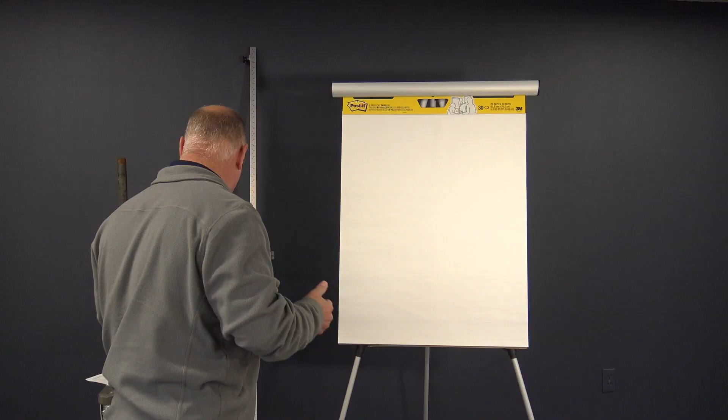Again, I love this feedback. It gives us the opportunity to mingle with our customers on some of the questions they might have. So this week I thought I'd talk about that base process and some of the things we've learned over the years to simplify it. Talking about lasers and whatnot, I thought I'd use a drawing board here to explain it.

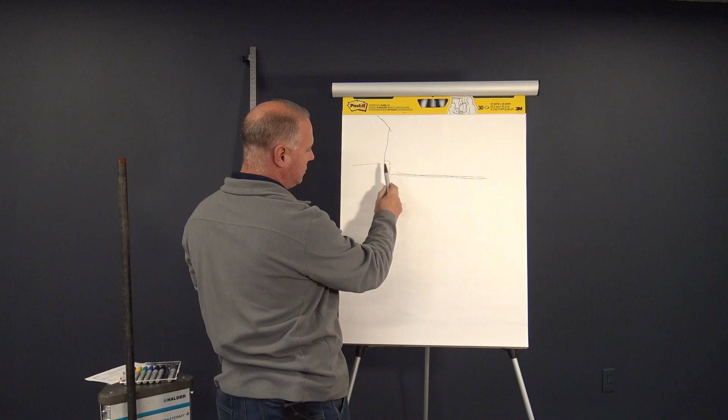So if you have your home here, and you're coming out on your patio, maybe a step, and then you want to lay pavers out in this area. You're going to dig down 8-10 inches with your base, put in your filter fabric. Again, this should have slope on it to match the slope of your patio.

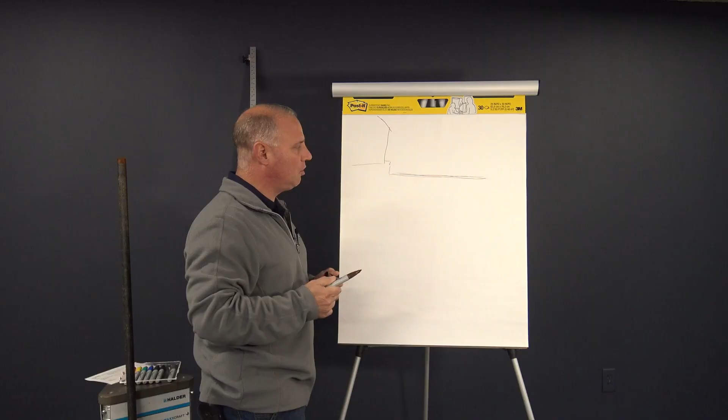If you're doing a non-permeable base, so your regular standard ICPI, you're going to want 3/16 pitch. I usually do 1 inch in 5 feet - that's very simple math for getting your slope. If you're doing a permeable installation, you can get away with a level base, but I would still recommend a slight bit of slope to get your water off, in case your permeable system plugs up over time.

The way I would do that is with a laser on your rough base. You can do it very simply. If you're going down 10 inches, I would add my 1 inch every 5 feet for my base. So if I'm out 20 feet, I know I have to be down 4 extra inches from this point - so 0, and this is minus 4 inches lower.

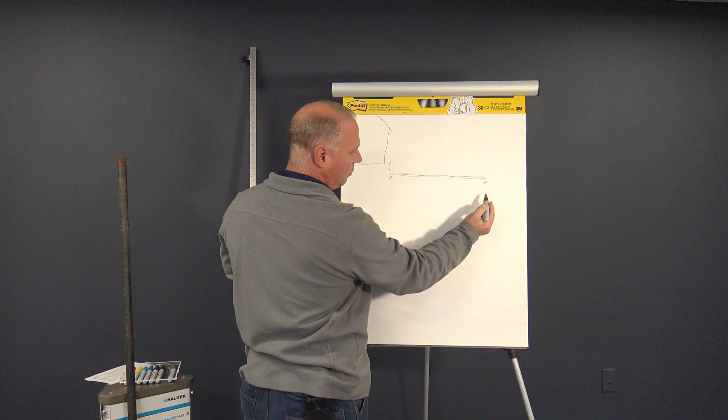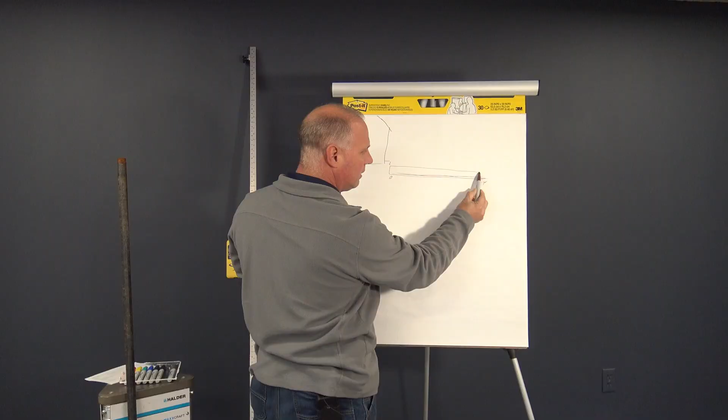So as we're building up, we're going to put in our filter fabric, and as we install our gravel, I would get it really close with your machinery, within an inch or two at this point. Then once I'm done basing, I'm going to get my laser set up again.

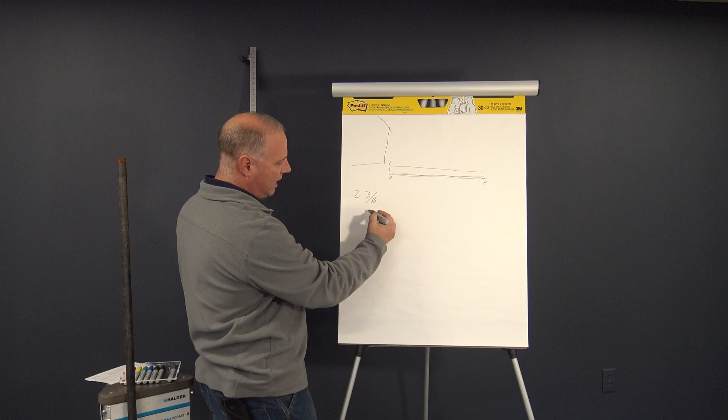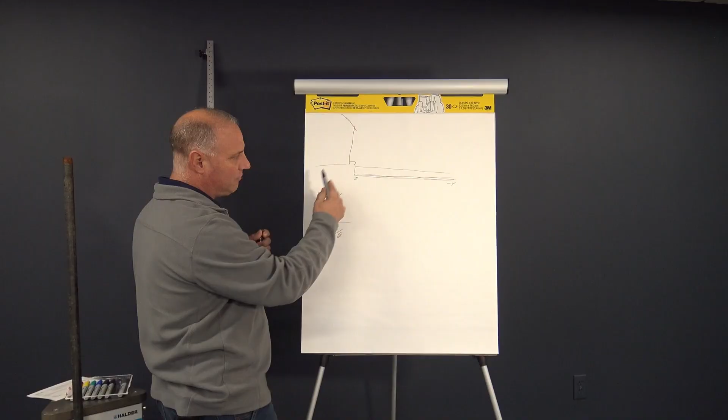If I'm doing a 2 3/8 paver, and I have my 1 inch setting bed - so that's 3 3/8 - I'm going to allow for my 3/8 of compaction after I run my compactor over my pavers, because it is going to embed down into your sand setting bed, that little bit of 3/8.

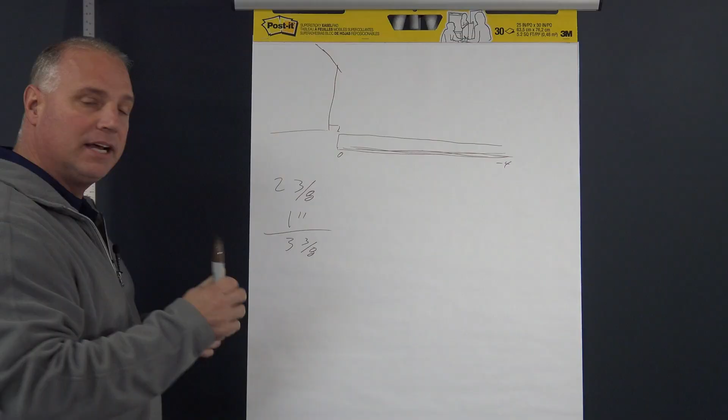If I'm doing a clean stone base with a number 8 stone, you're going to probably only compact about an 1/8 or maybe a 1/4 at the most. So keep that in mind whether you're doing a clean stone base or a dense grade base. Again, that's your 3 3/8.

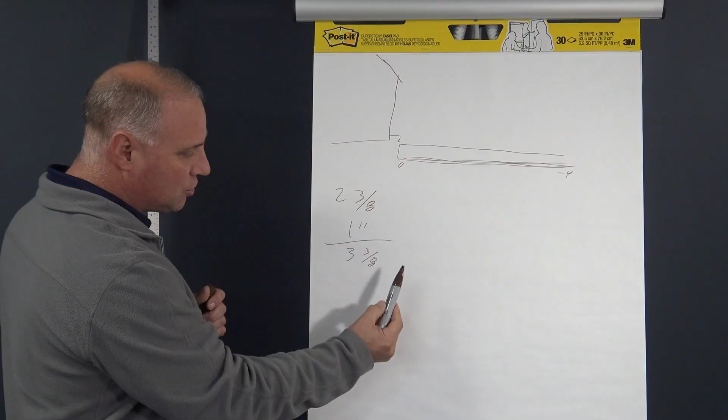Generally, if I'm doing a dense grade base, I'll go -3 from finished grade. So if I get my finished grade exact right here, down the step in my paver, I'm going to go -3 to the top of my gravel.

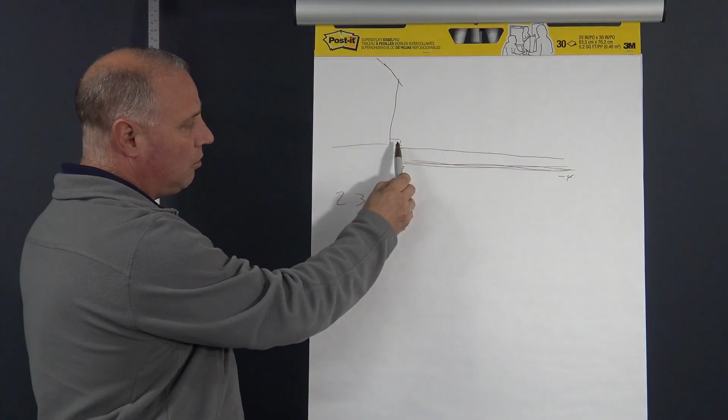The way I'm doing this is I'm going to use my laser level and my laser rod - this really simplifies things. I'm being honest, our guys are really crippled without this tool. We built this on the 0-0 system, which has an internal foot allowing me to set any point on my job to 0.

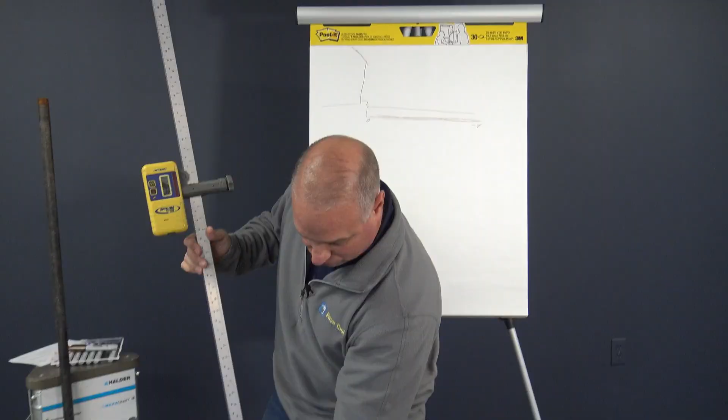So again, if I'm on my job site, I'm going to set my laser rod here, right at this point. I can even build it into my stairs or however I want to do it. But if I want 0 right there, I'm going to set it at that point.

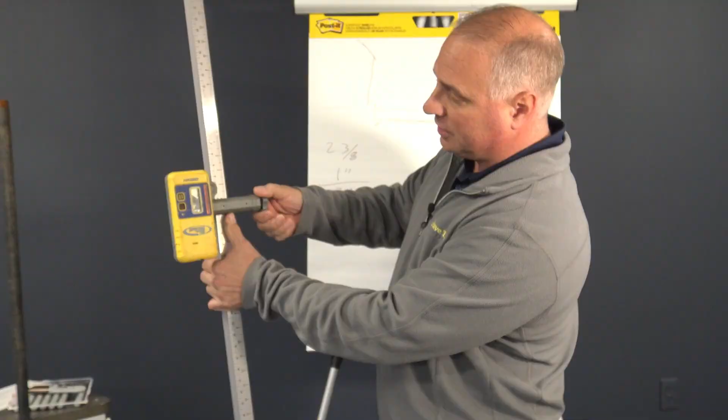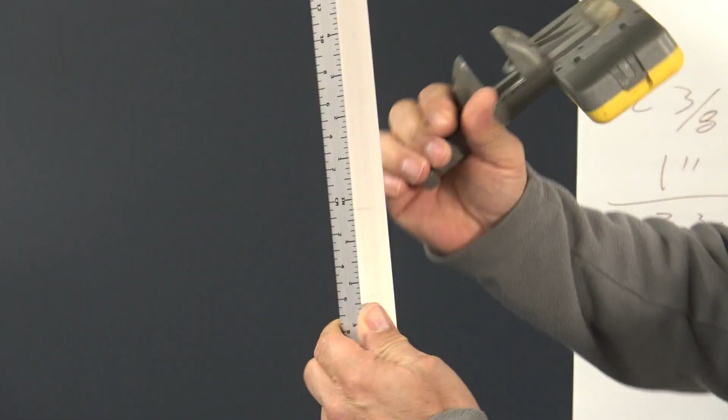This laser rod has 0 here in the center. It's in inches or centimeters, graduates up in inches and centimeters, graduates down inches and centimeters. I have up and down elevation here. On the other side of the shaft, I have 0 at the bottom, graduates all the way up. You'll notice I have stoppers on both the top and bottom.

That allows me to either reverse this pole or say I'm going up a big slope. It gives me a full 6-foot laser rod of elevation there.

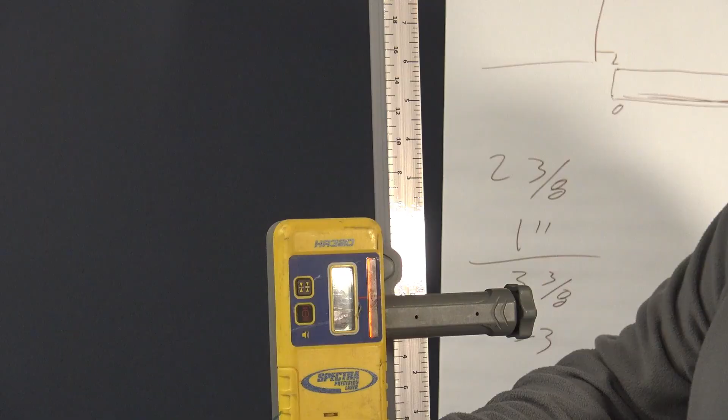But like for this situation here, I can set my laser here. I can lock it at 0, so I'm tightened right up. I'm sliding my pole, so when I get my laser set here, I slide it up. Beep - I tighten that up. So now that point is 0. So I've got my point here at 0.

Now I can slide it up to -3. So up to go down, I'm going to go up to 3. That should be my very top of gravel right there at that point - that should be right there, my top of gravel.

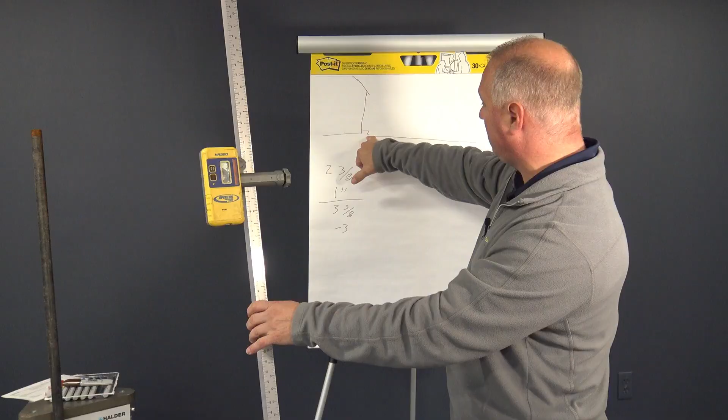So what I'm going to do then is set my - again, if you want to use your screed rail, this is a 5-foot screed rail. We also run 10-foot screed rails, and it makes it really easy if you have 5 or 10 footers, that's generally the way they're going to sell a rod like that, 5 or 10 foot lengths. So if I come out here with a 10-foot length, 1 inch in 5 feet, so simple math, I know I have to be down 2 more inches, out 10 feet.

So literally I can set this rod, I can wiggle it down into my gravel, or again, if I keep that gravel just a little bit low, I can set that pipe exact there. I can go out my 10 feet, and again, I'm -3, so if I add my 2 inches up to go down, now I go up to -5. So at 10 foot out, I'm -5 right here on my base.

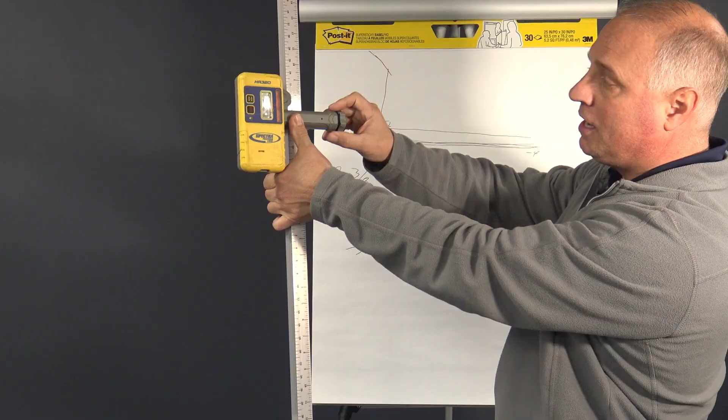If I go out another 10 feet, I'm going to go up another 2 more inches, -7. And I can set those rails right across there. I can set it on my left side of my patio all the way out. Very simple.

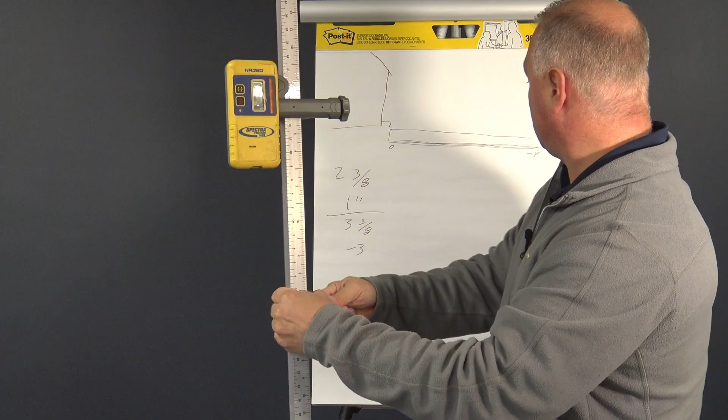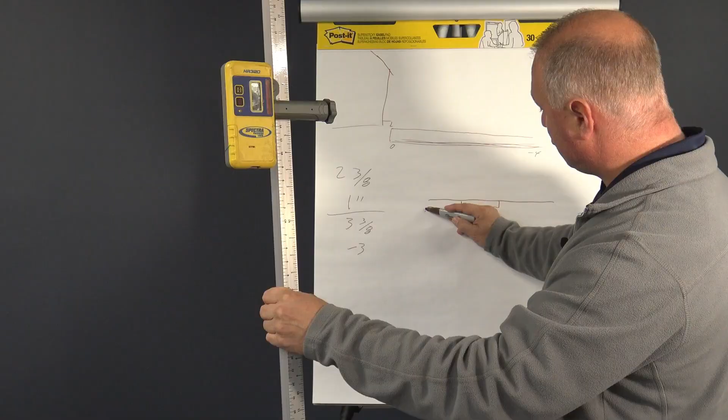So if I'm looking down, this is the back of my home. This is that step that I was talking about. So if my patio is out here, again, I'm going to be my -3 here, out 10 feet. I'm going to lay my pipe in here.

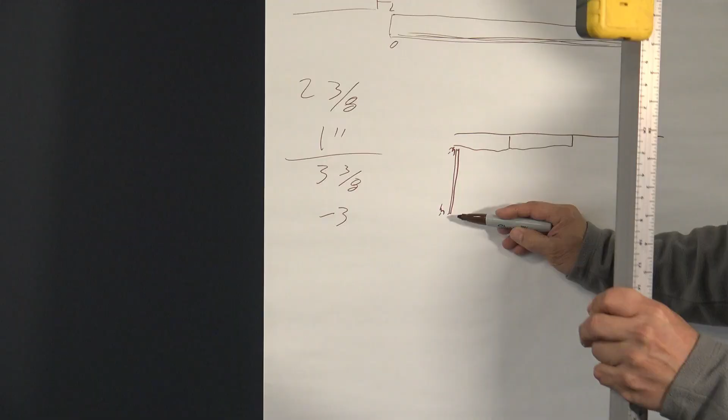-5 here, I put another pipe on the end there. My arm's probably right in the way, sorry. If I come out here another 10 feet, -7. So now I got the pipe there.

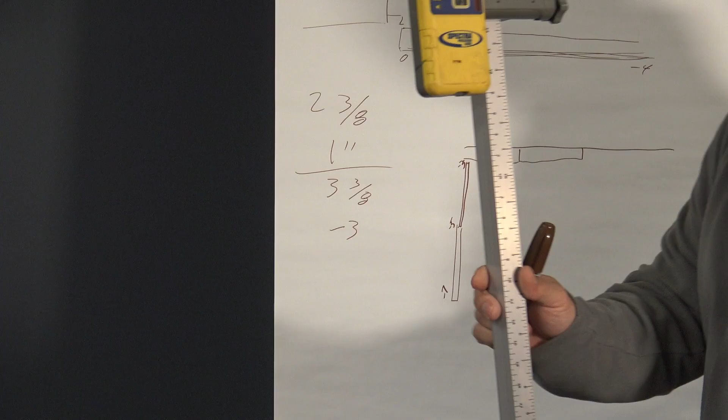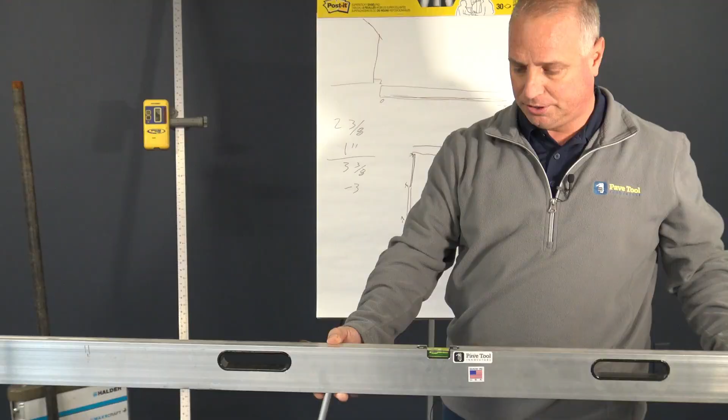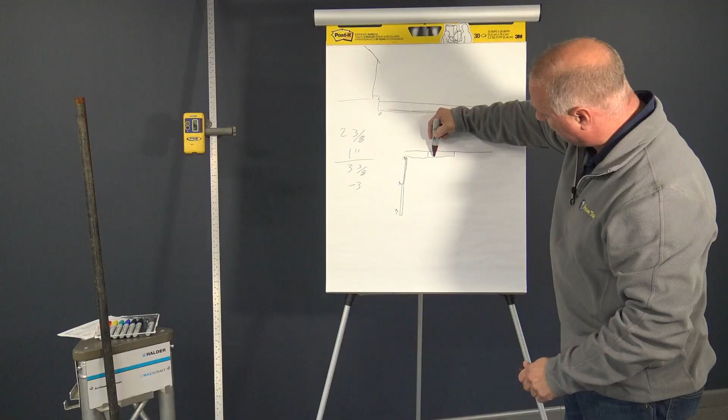I'm also then going to use - I'm just going to set this aside a second - a nice heavy-duty straight edge, like our aluminum straight edge. It's got a level built into it, which makes it really convenient. And if your math is right on your laser, you can always double check with your level. So I'm going to take this level, it's going to go 8 foot across here, my patio again. Hopefully that's clear to you. This is my patio out here.

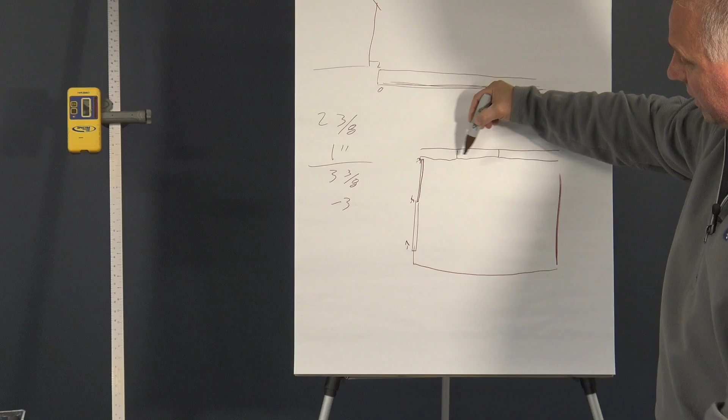Again, just a simple square patio. So I'm going to go over here. My straight edge is 8 feet, so I'll go 7'6", 7'9". Come back here, slide my laser back down.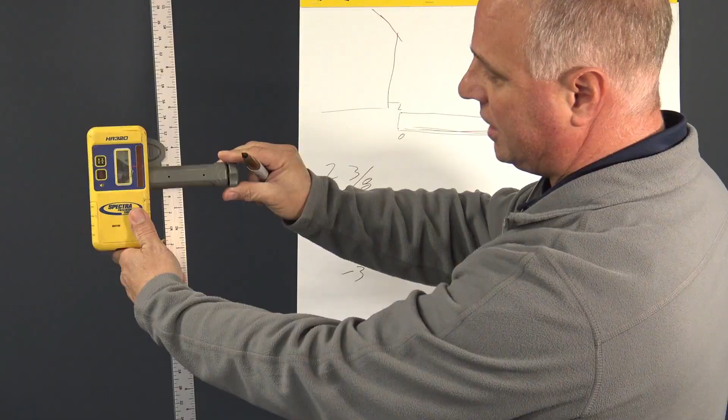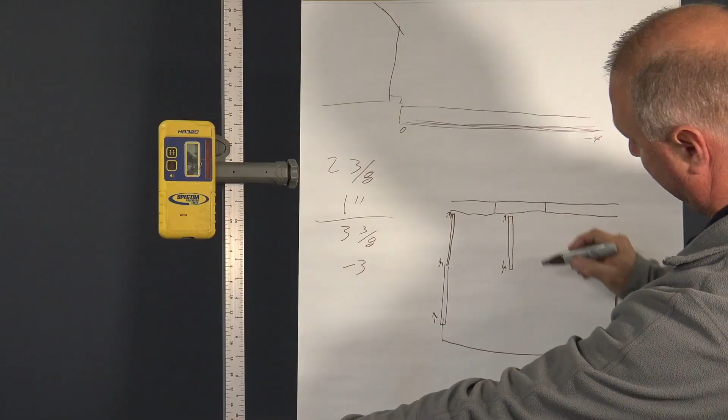I'm going to set my second pipe at this point, out 5 feet or out 10 feet. So -3 again, -5, my other pipe on the end, -7. So again, you're going 2 inches, an inch every 5 feet. 5 foot, 10 foot, -2; 5 foot, 10 foot, -4. So you're going down - your 3 plus your 4 is your -7.

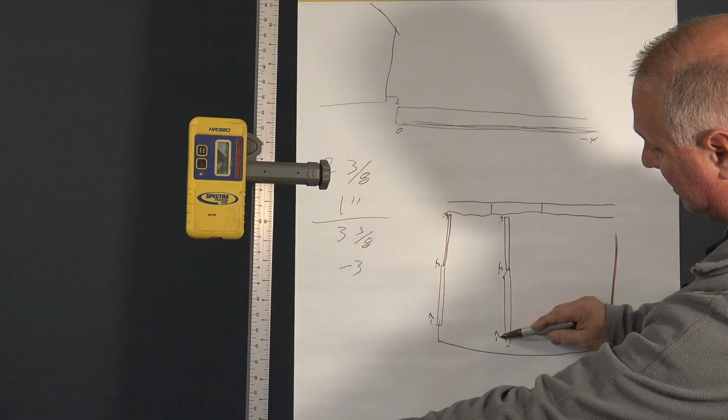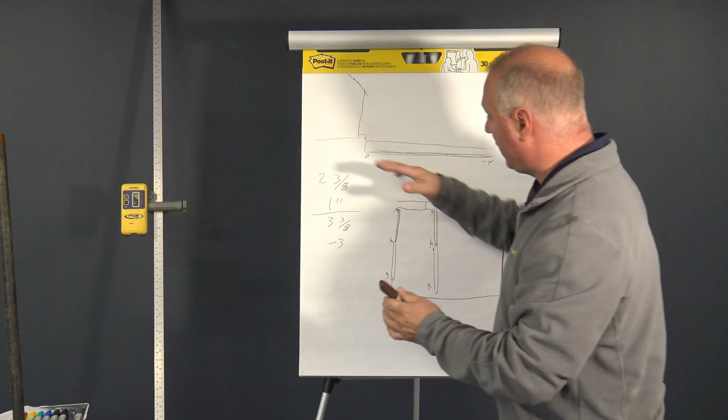So again, just simple math, and if you need to build it on a grid or a chart, that's sometimes even easier yet if you use graph paper. You can lay it out that way so you can get your slopes. But that's really simple, and at this point, that's 7 foot 9 inches.

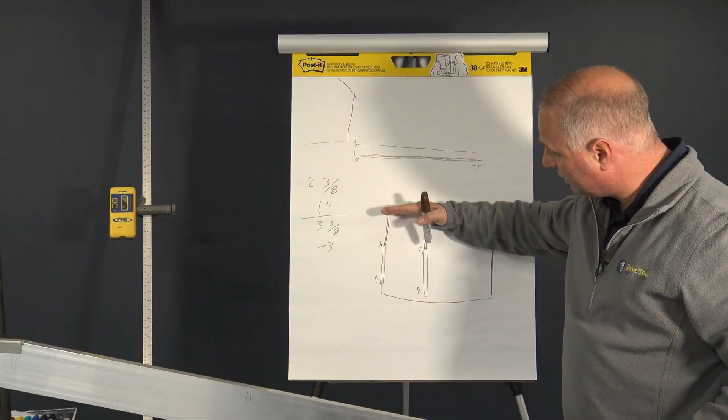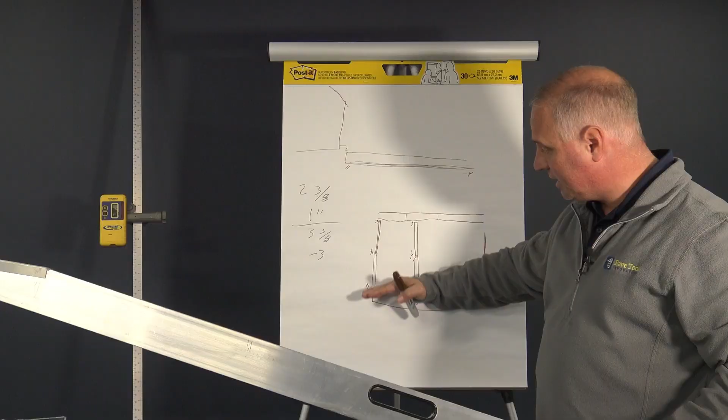I can take my level, set it on there, and just drag that down. That gets my gravel perfect. I can compact it quickly, and then I'll probably drag this one more time, especially if I've got some lower spots, and I can get it exact. So that would give you an exact, perfect setting bed.

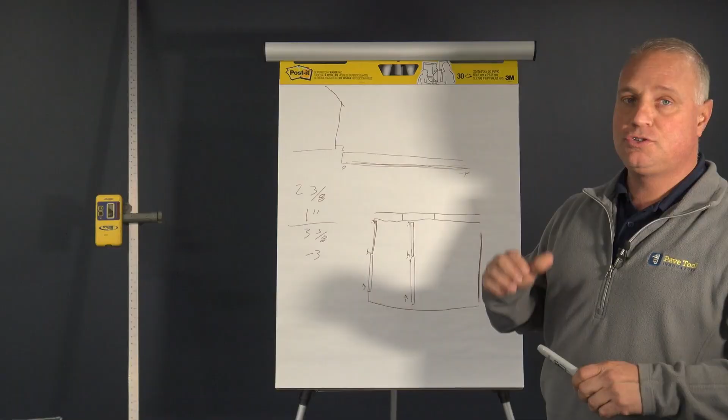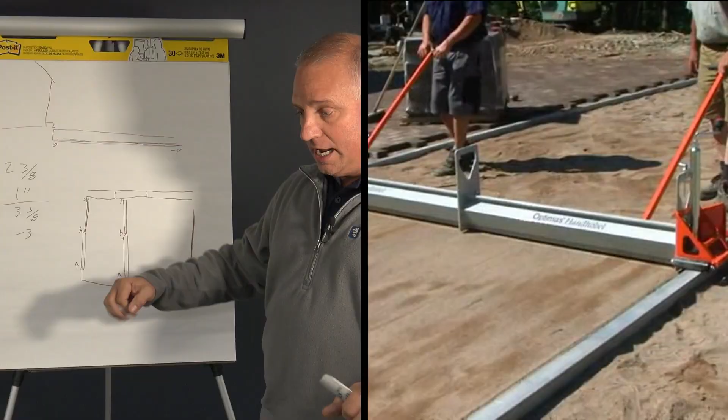Another option, we have our brand new Optimas line that we took on. They have 2 great products you can do by hand or even with a machine - the mini screed or the maxi screed. So again, screed rails that come with it, and it has adjustments on the side, like a jack stand. You can crank it up or down and lower it, and that could sit right on here, and you could drag that out to get your gravel height.

And then you can also use those same rails for getting your sand or your number 8 stone for your final setting bed. So you're just going to crank those jacks up an inch for your 1 inch setting bed.

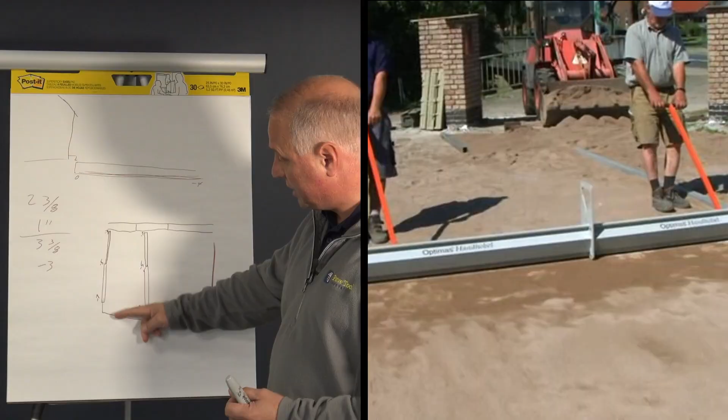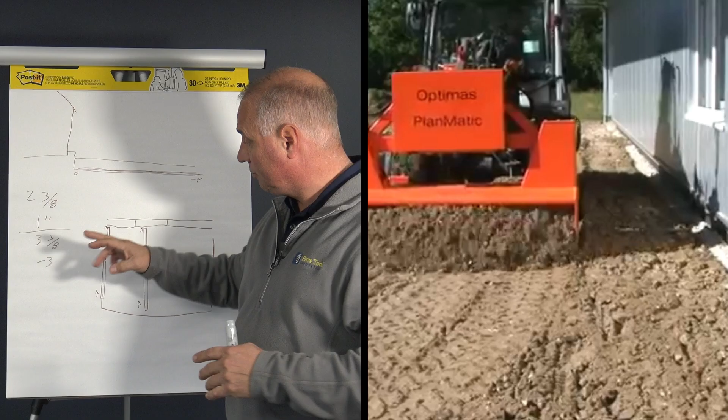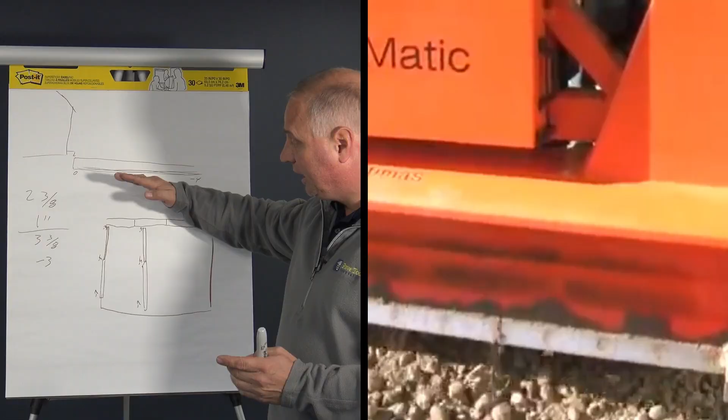To take it a step further, Optimas also has their PlanMatic, which is hooked up to your skid steer and runs off lasers. So that would be on the front of a skid steer, running off the lasers, and you're setting your laser - you can build in slopes to the laser. So you'd actually set your laser, and you'd set the slope to it, the 1 inch and 5 feet. You could adjust that, and then the machine - all you're doing is just driving the machine backwards with the material.

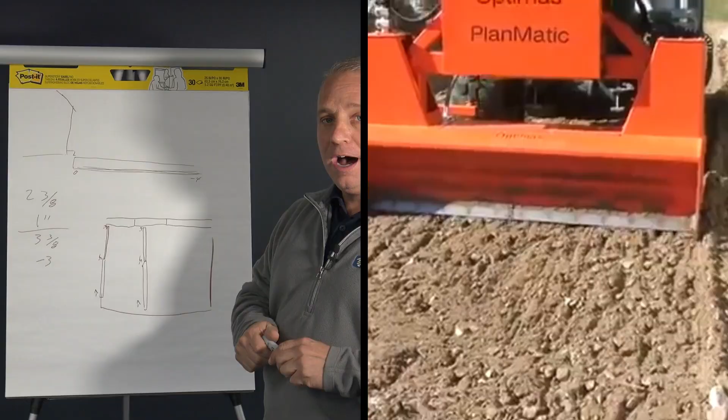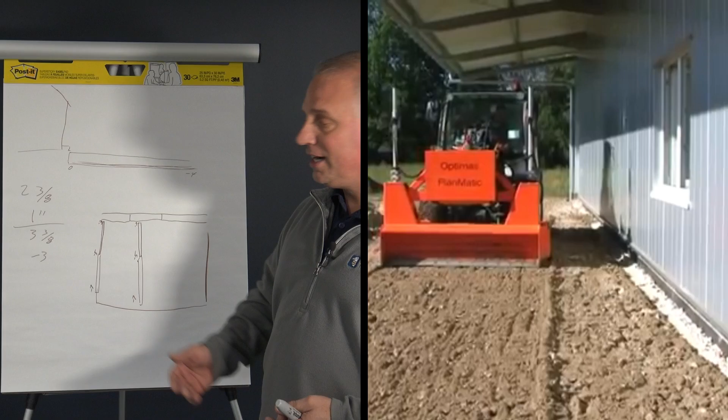And it'll actually get your leveling bed within a 1/16 of an inch. So super cool equipment. Maybe not necessarily for a small backyard patio, but for larger projects or larger driveways. That's one way you can do it with equipment based, where you're literally not touching anything. That equipment will do all of that.

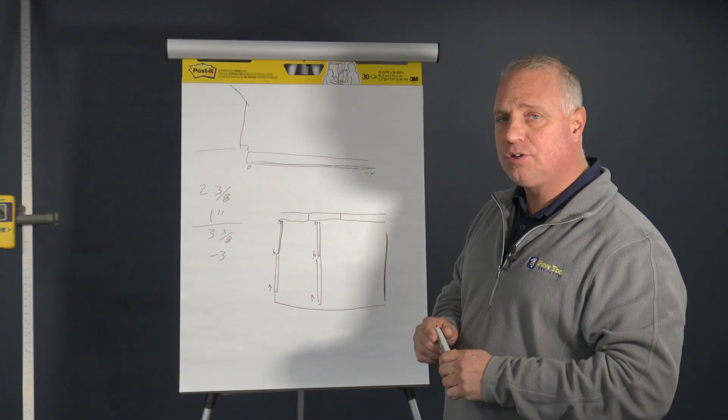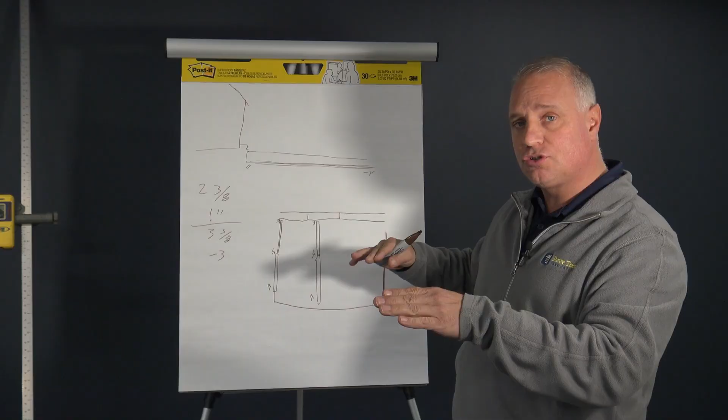So hopefully this is helpful. Again, this is a simple square patio. If you're doing walks or something like that, you can do the same thing. If you're coming out of a home with a serpentine walkway, again, you can set your slope. You can figure out how many inches it is down to your driveway, or from your front walkway down to your driveway.

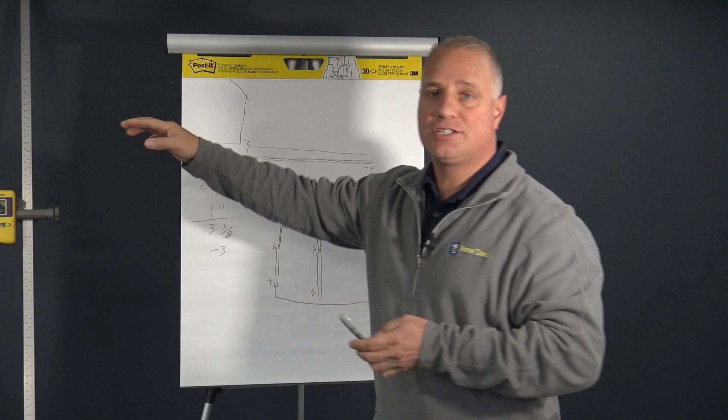And then you take your distance and just divide that up. So if you have a 30-foot walkway and you've got 6 inches of elevation, you just do the math - you divide the 6 inches by the 30 feet. And obviously you're going to go that distance every foot, or every 5 feet. You can break it up however you want.

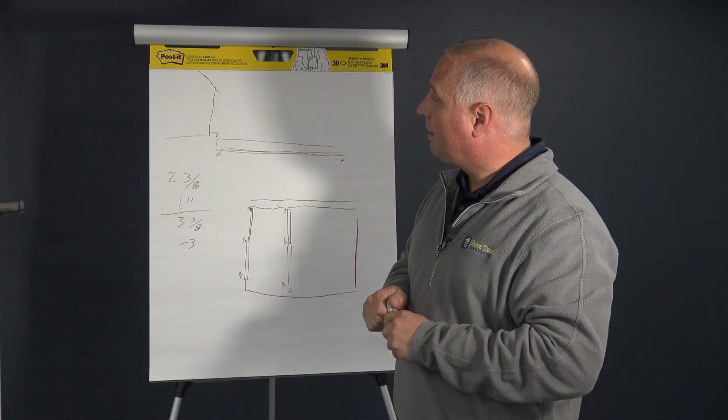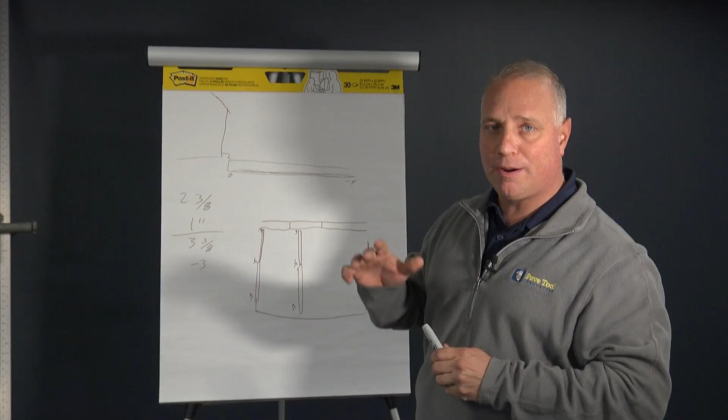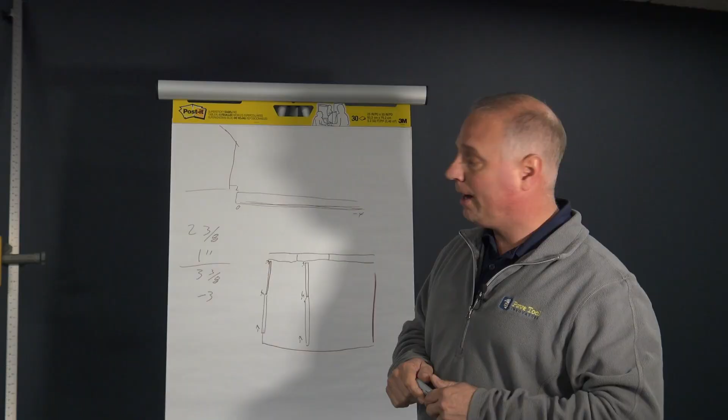So hopefully a few good tools to help you. Many of you are obviously doing things this way already. Some, like our excavation crews doing the prep work, a lot of them have been on equipment for over 30 years, so this becomes second nature. A lot of this is done with equipment and just double checking with a nice long straight edge, just to make sure our base is proper. But again, the laser really is a flawless way to get your base exact.